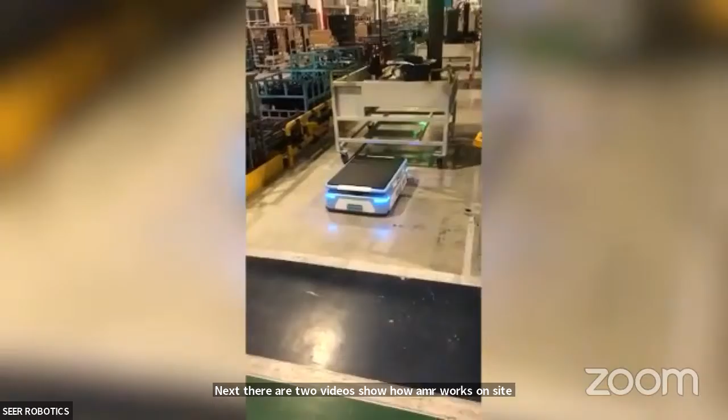The lifting AMR model slides under the bottom of the rack and lifts it up with a special mechanism. This way, it moves materials around, saves on labor costs, and takes the stress off workers. Next, there are two videos showing how AMR works on site. The first video shows the transportation of the mobile racks.

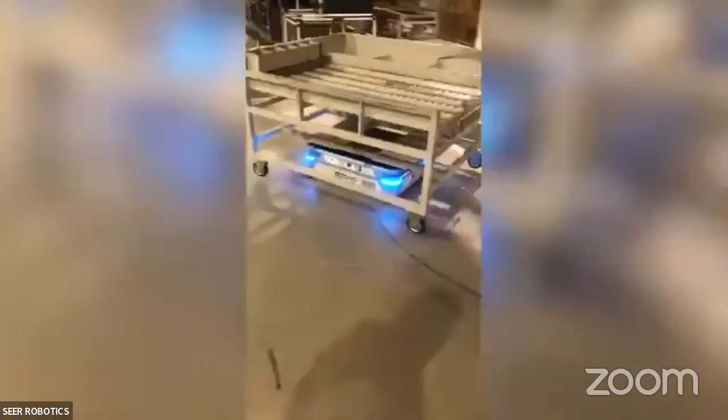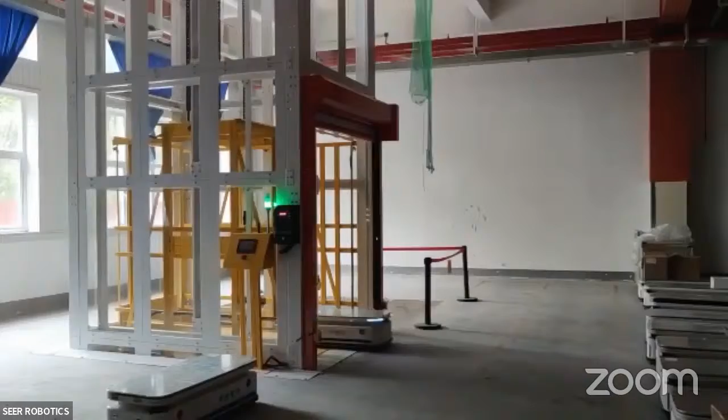Okay, the next one shows the interaction between AMR and the elevators.

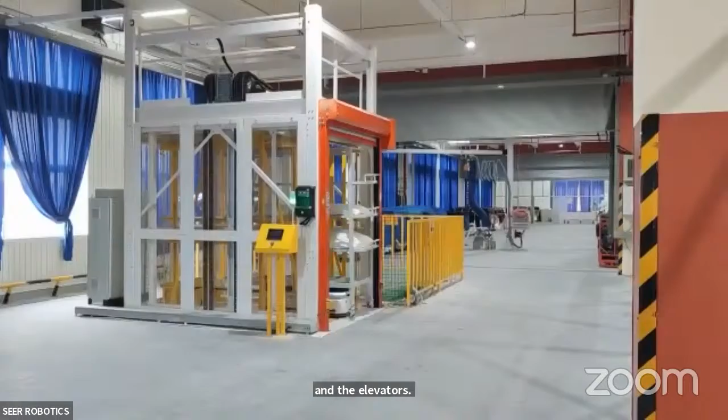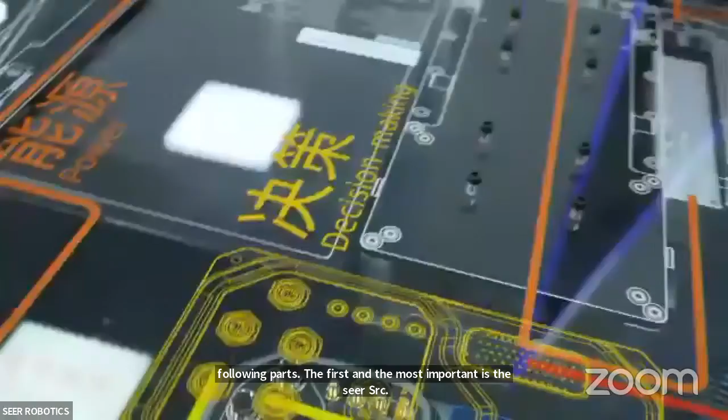All right, next, we will dig into the details of our featured model, the SEER lifting AMR. Right now, we have the AMR model here, so we can get a clear visual sense of what's inside. The structure of this robot mainly includes the following parts. The first and the most important is the SEER SRC controller. It's responsible for the robot's path planning and motion control, which is the brain of the robot.

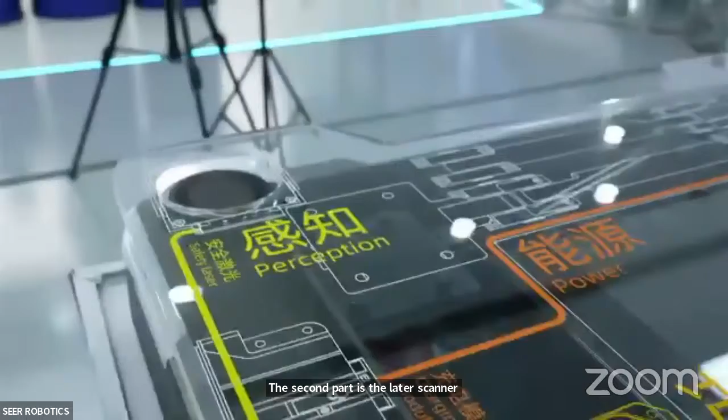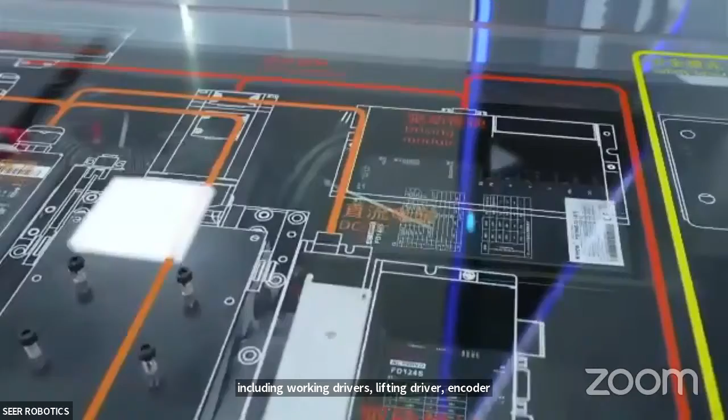The second part is the laser scanner. It's the perception component used for navigation and safety detection, which is the eyes of the robot. The third part is the drive and control unit, including walking drivers, lifting driver, encoders, reducers, motors, and so on, which are the execution units and use the difference in speed between the two walking motors to rotate.

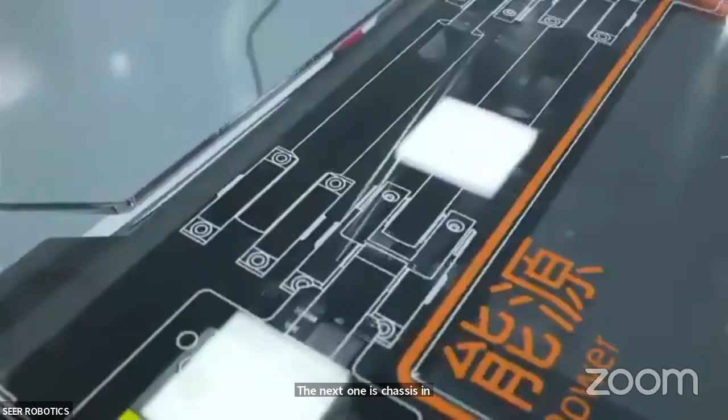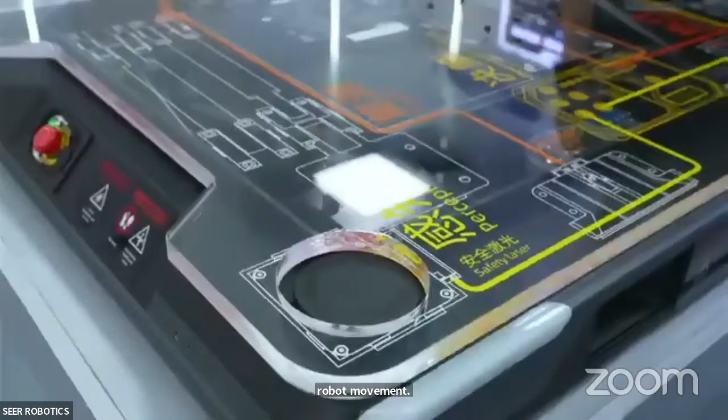The next one is the chassis, including suspension and shock absorption, providing a stable foundation for the robot's movement. Besides that, this lifting AMR has a really smart navigation and SRC control system. It can recognize QR codes with a camera, rack legs with a laser scanner, and do other cool recognition stuff.

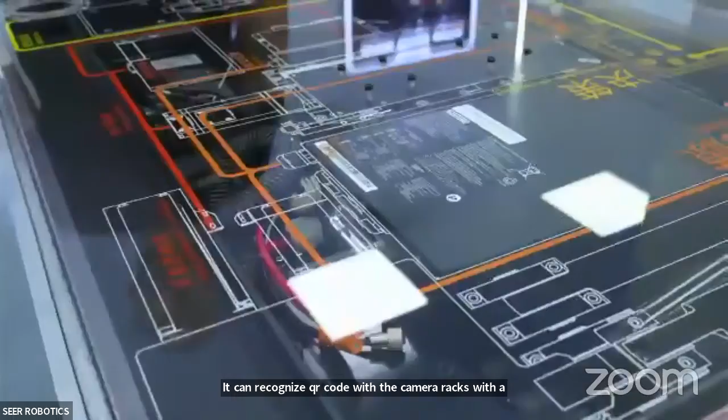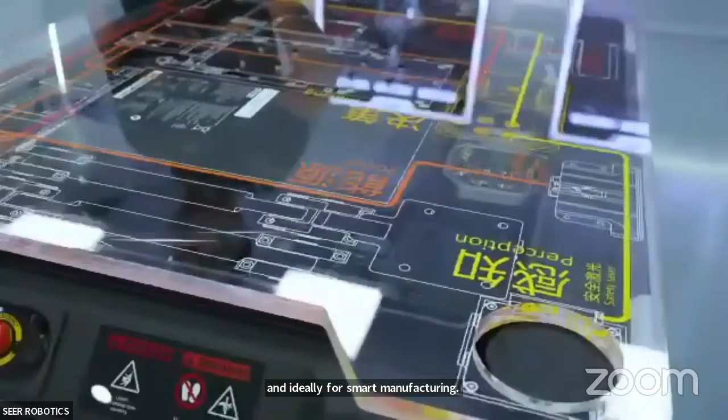Plus, it can avoid obstacles with lasers and 3D cameras, and find a way around them. It's highly versatile and ideal for smart manufacturing. In summary, AMRs are versatile and come in various forms. They are essential for modern automatic factories. The lifting AMR, with its advanced technology and reliable performance, is a powerhouse in the smart manufacturing scene.

Next part, we're going to look at the core components selection. First, a very important part is the drivers. When it comes to motors, you've got to pick the right driver for the job. For example, if you've got a DC motor, you will need a driver that keeps the speed steady. But if you are dealing with an AC motor, you will want an AC driver. Plus, you've got to think about things like how much power the motor needs, the voltage, and the current. Make sure the driver can handle what the motor needs to do its thing.

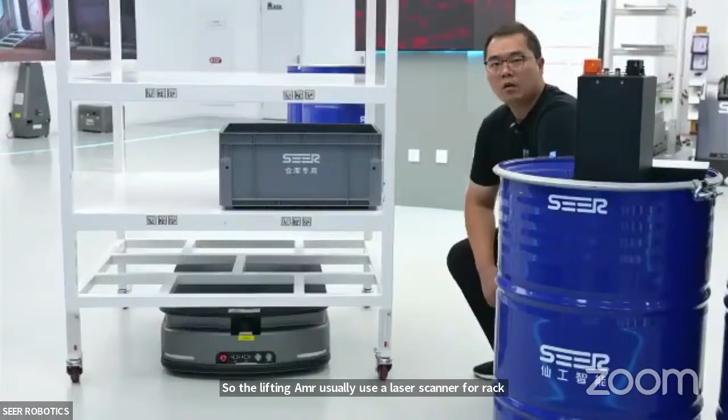The last part is the recognition of the carriers. The main load for the lifting AMR is racks, single or multi-layer, and some pallets with suitable heights also work. So the lifting AMR usually uses a laser scanner to recognize the rack leg shape, like this, or reflective tapes are added.

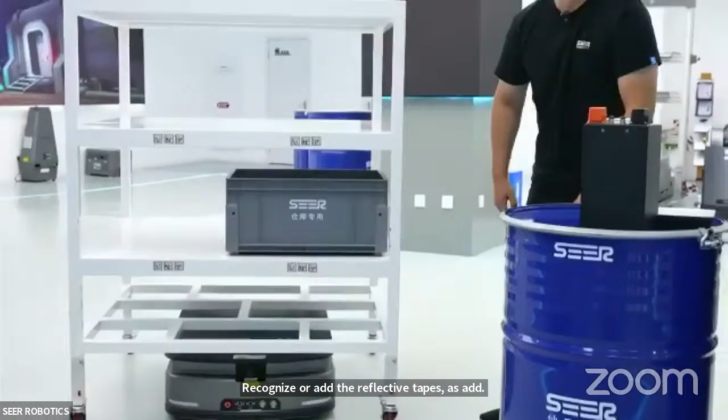Lifting AMRs that navigate purely with QR codes do not have the function to recognize the racks. And for black racks, reflective tapes must be attached to the legs to ensure normal recognition.

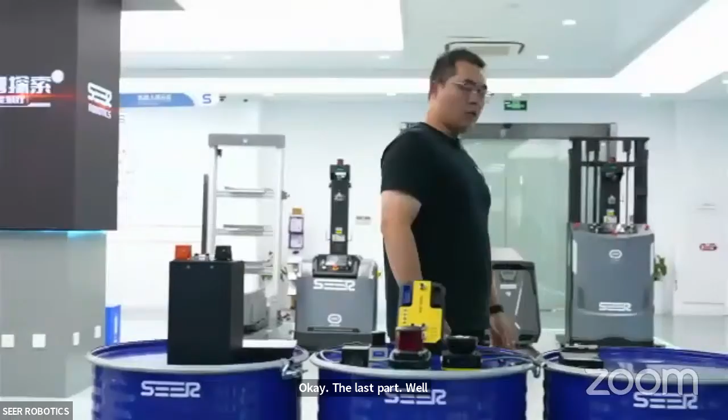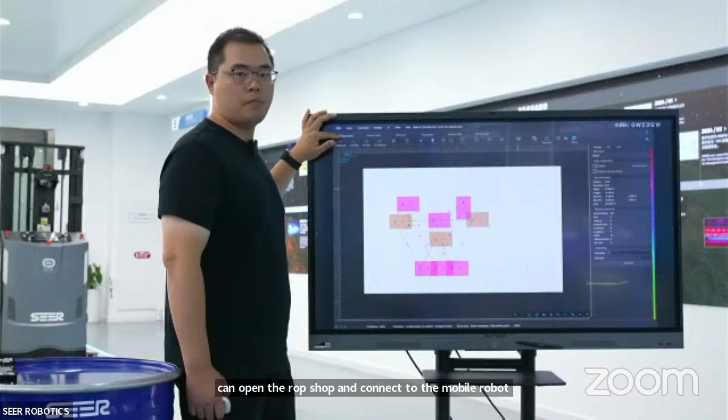In the map control taskbar, you will find Others and then Calibrate Robots. You will find very many items that need to be calibrated. But due to the priority relationship between calibration items, different items need to be automatically calibrated in order. You can find the details in the operation manual, of course.

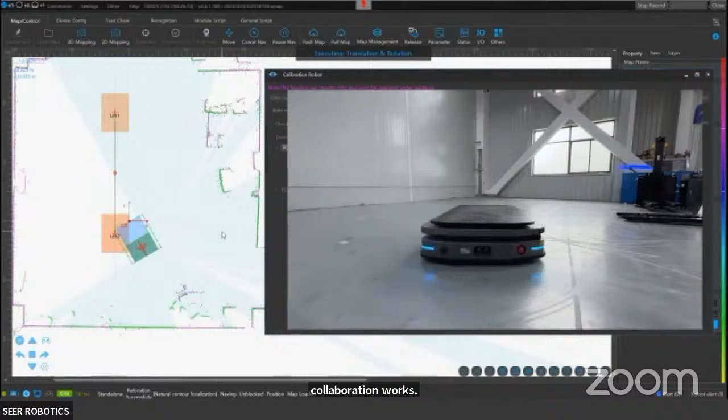Here's a video that shows how the calibration works. Because there can be errors during the manufacturing of the vehicle body, sensor installation, or component mounting, calibration is a necessary step before putting mobile robots into use.

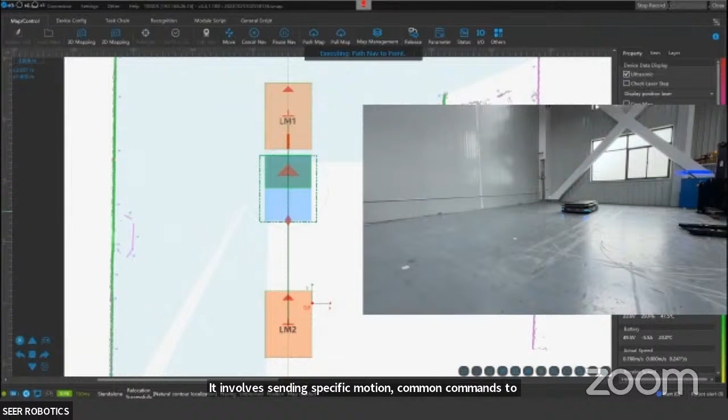It involves sending specific motion commands to the robot, collecting sensor data during the process, and then calculating corrections to the parameters of specific model files to make them more accurate to the real condition. The main objects for calibration include the laser, odometers, and the steering wheel angles.

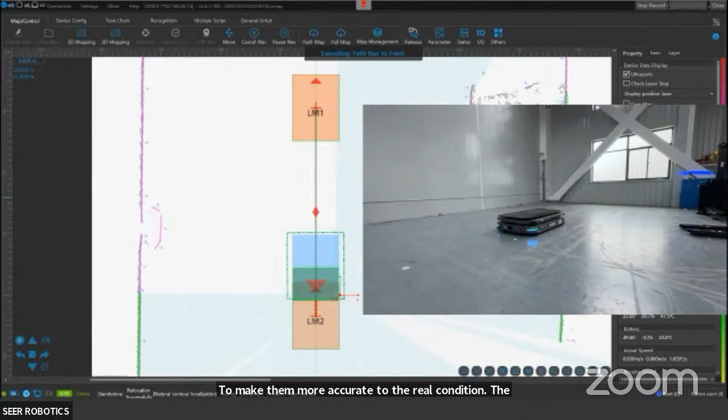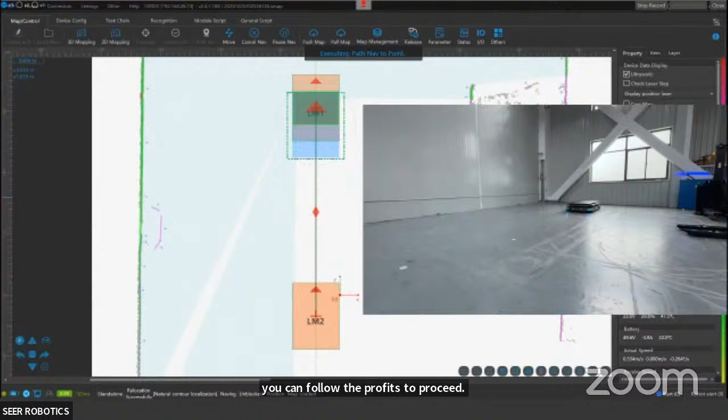After you go through all the calibration steps, RoboShop will pop up a window showing the result, and you can follow the prompts to proceed. The video shows sending commands to move the vehicle to a station to demonstrate precise positioning.

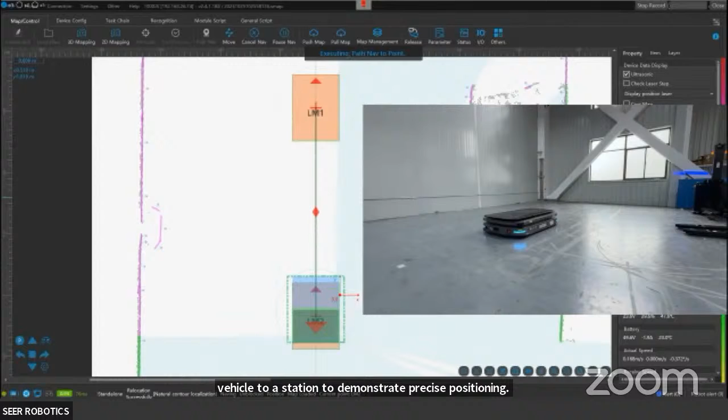Okay, that's all I have to share with you. The last part is the Q&A. Let's look at what kind of questions are in the comments.